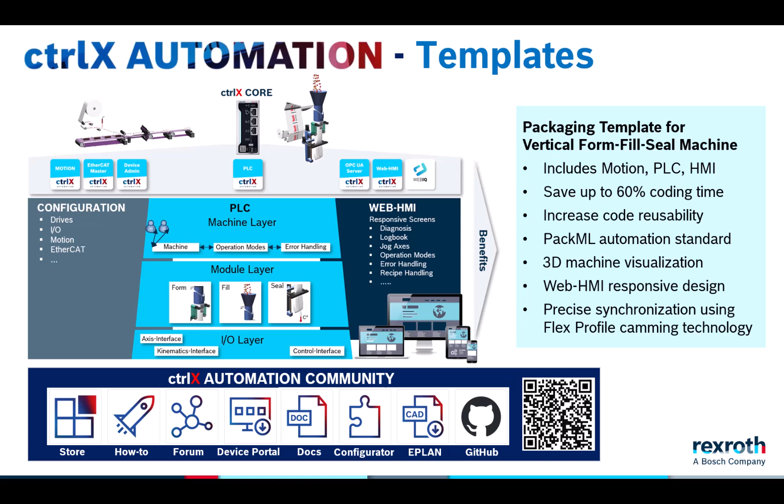Hello ctrlX fans. This video provides an overview of the Vertical Form Fill Seal template for ctrlX Core.

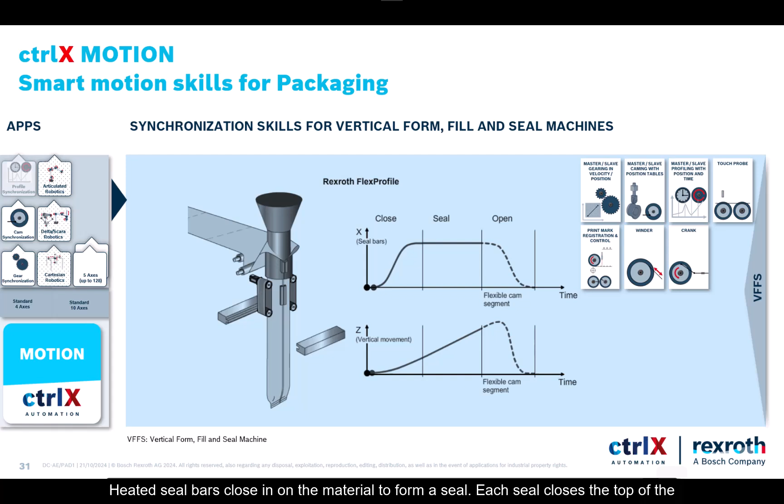Vertical Form Fill Seal is a packaging application in which food or other product is deposited from a hopper into a continuous flow of packaging material such as foil or plastic. Heated seal bars close in on the material to form a seal. Each seal closes the top of the last bag and forms the bottom of the next bag.

The seal bars are controlled by a horizontal axis, sometimes referred to as the jaws, which open and close. Since it's a continuous process, a vertical axis is required to synchronize the jaws to the material while the seal is being formed, and then return to the top for the next seal.

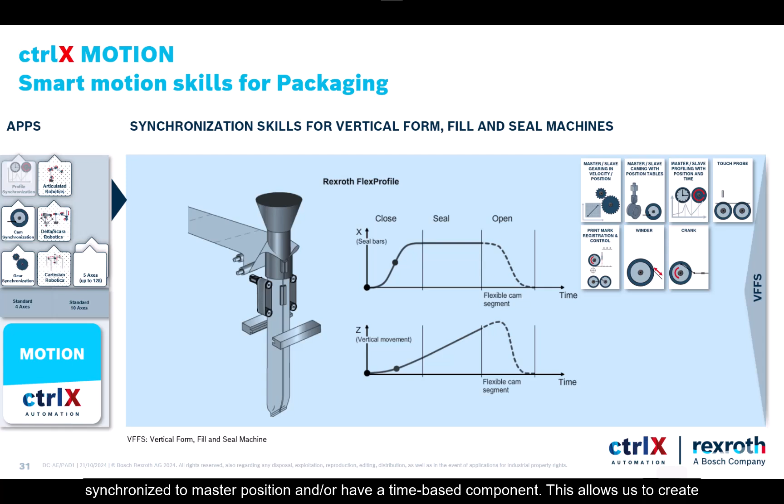This motion is achieved using Flex Profile. Flex Profile is a form of electronic camming with special features that lend itself to this application. For example, a Flex Profile segment can be synchronized to master position and/or have a time-based component. This allows us to create a profile which stays synchronized to the web while the seal is being made, and hold sealing time constant as the profile adapts on the fly to changes in machine speed.

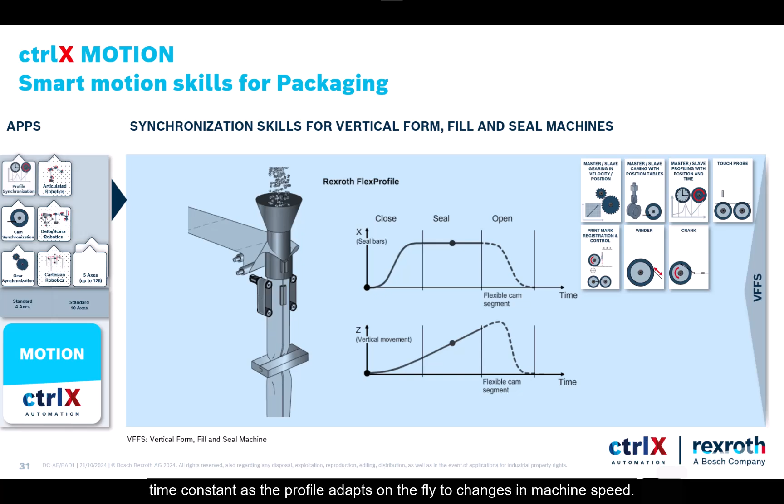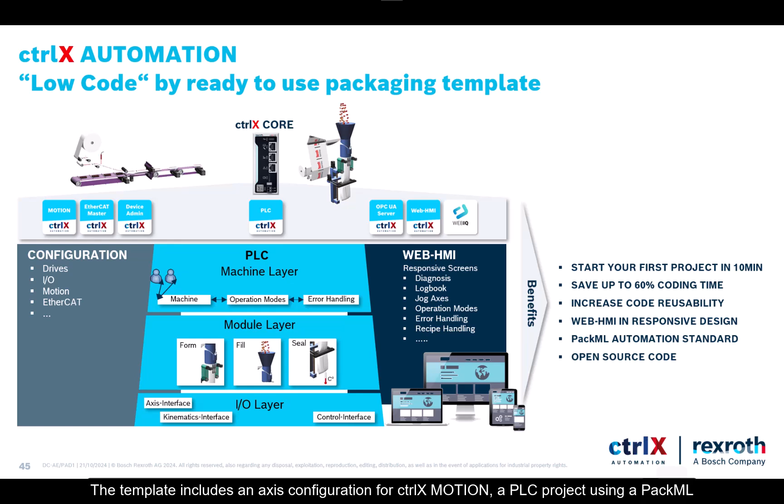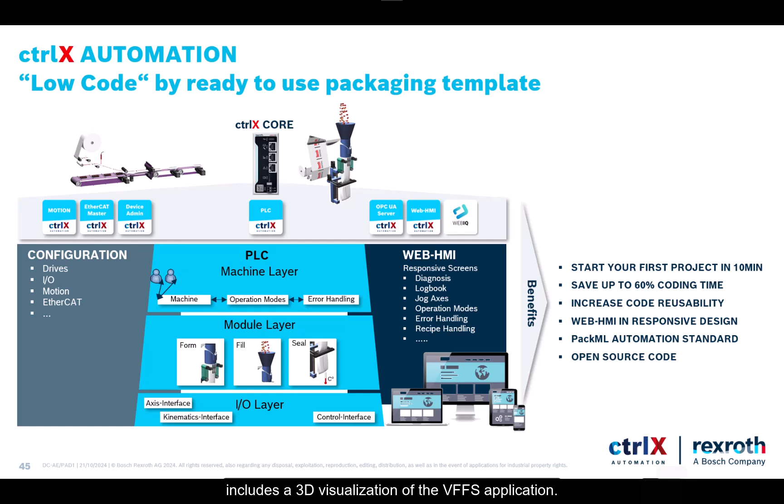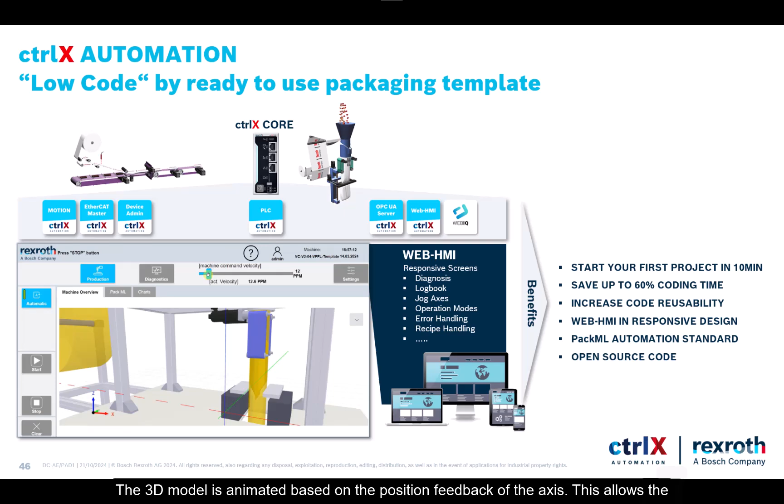The template includes an axis configuration for ctrlX motion, a PLC project using a PackML programming structure, and a web-based HMI using WebIQ. It also includes a 3D visualization of the Vertical Form Fill Seal application. The 3D model is animated based on the position feedback of the axes. This allows the user to visualize the process without needing any physical drives or machinery present.

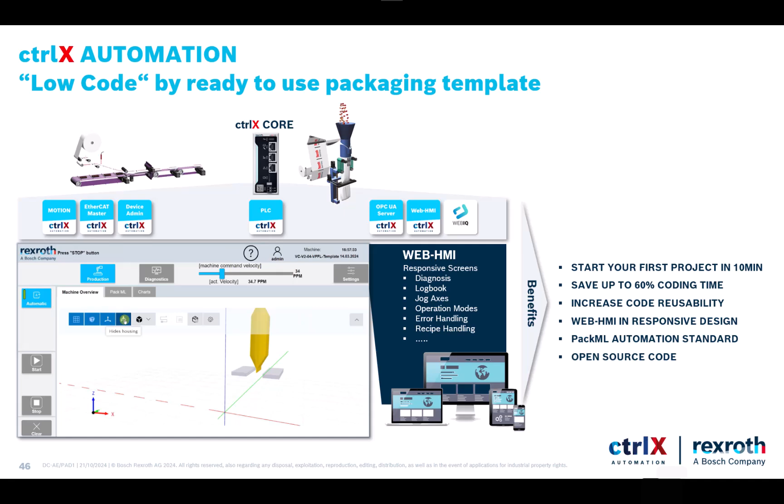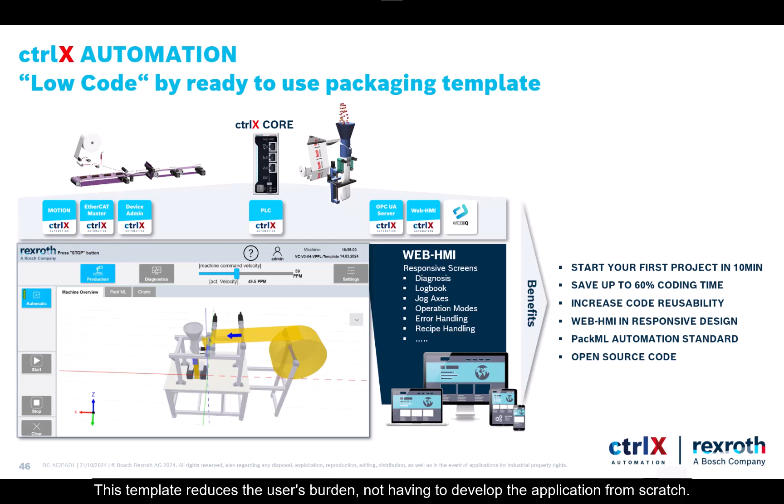Using this template reduces the burden on the user to have to develop the application from scratch. Included in the template package is this image of a virtual ctrlX core that has everything that's needed for the template preloaded on it. And this how-to guide tells you how to set up and run the virtual ctrlX core, and then run the application.

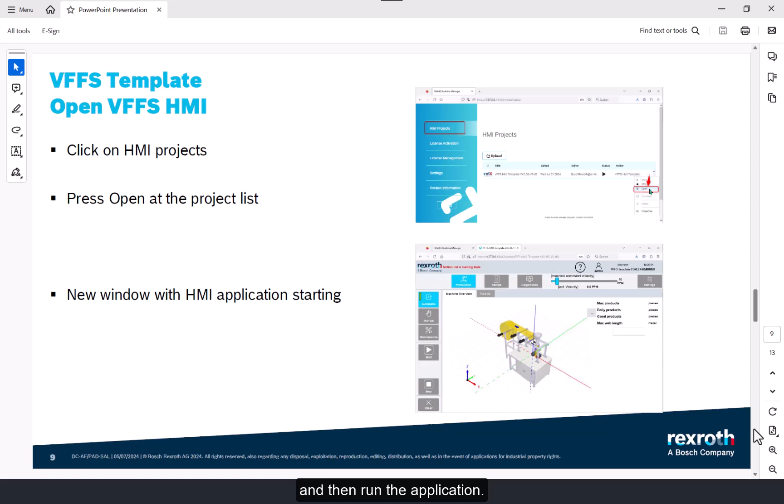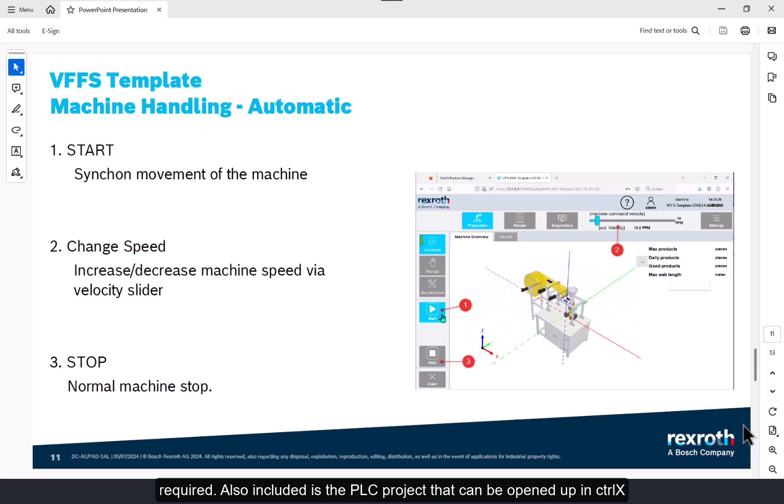This allows you to test the motion, PLC, and HMI without needing any hardware and without needing any software licenses. A free download of ctrlX Works is all that is required. Also included is the PLC project that can be opened up in ctrlX PLC Engineering, and the WebIQ HMI project.

And the app data archive, which could be loaded to a ctrlX core. The app data includes the EtherCAT and motion configurations along with the compiled PLC project. This is the dashboard of a ctrlX core that is running the Vertical Form Fill Seal template. Let's take a look at the apps and licenses that are involved.

If you only want to run this on the virtual ctrlX core to evaluate it, then you don't need any licenses. All the apps on a virtual ctrlX core will work for 4 hours of runtime, and after that point you can stop and restart the virtual machine to get 4 more hours. But I'll point out the licenses that are needed if you want to run this on a physical ctrlX core.

So we have the motion app, and with that one you'll need the motion standard 4-axis plus an additional add-on axis because 5 axes are used for this application, or a motion standard 10-axis would work. You'll also need 3 add-on licenses for motion: 1 for electronic gearing, 1 for camming, and 1 for Flex Profile.

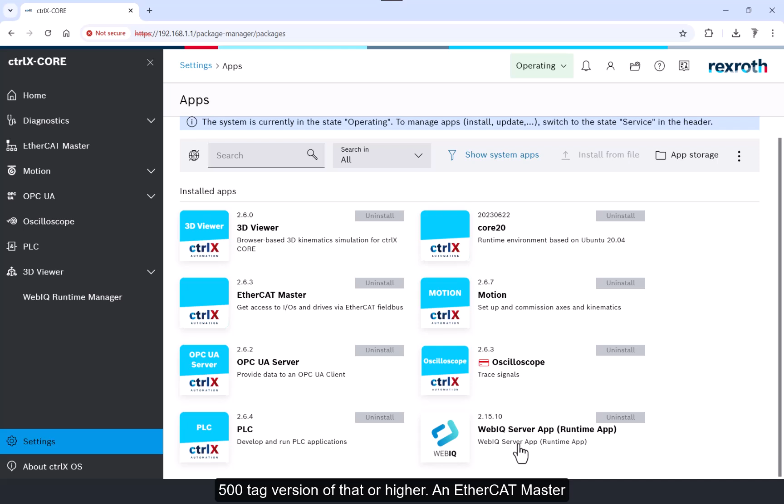And then for the PLC, you need the PLC Basic and Standard licenses, and that's for PLC version 02. And then the WebIQ server app, that's for running the web-based HMI project, and you need the 500 tag version of that or higher. EtherCAT master will be needed when you get to the point of connecting the axes in motion to physical drives to actually run a machine, and so this requires an EtherCAT master license.

The 3D viewer app is used to visualize the CAD model of the machine and animate it in real time while the machine is running, so that requires a license. OPC UA server is needed to connect the WebIQ application to the ctrlX core, so that needs a license. The oscilloscope app is just an optional app for diagnostics and troubleshooting to be able to trace signals in the motion and PLC, but that is not needed to run this template.

And the Core 20 is just a system app that's needed for WebIQ to run. This app does not require any license. From the ctrlX core dashboard, we can go to the 3D viewer app.

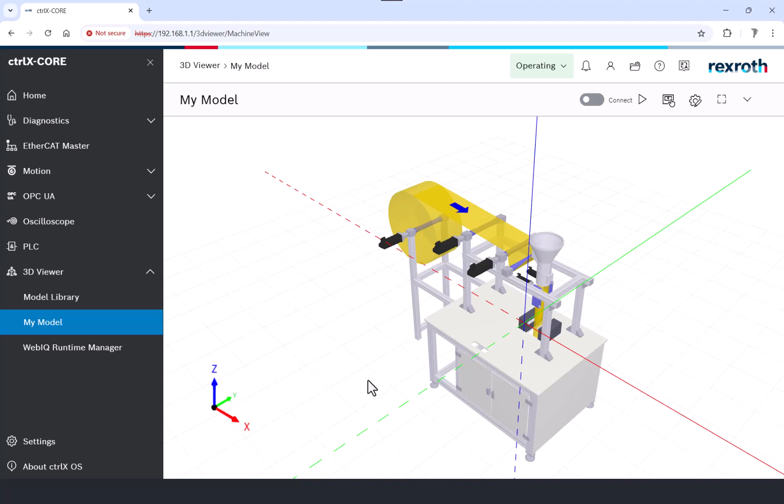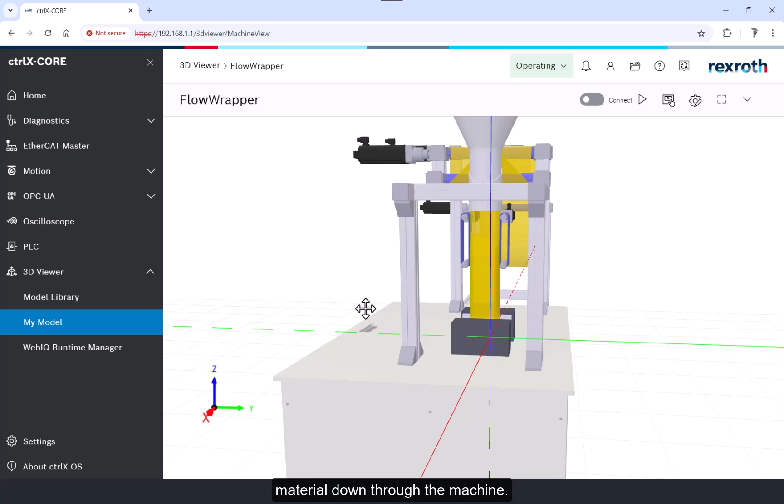And so this is the CAD model of a vertical form fill seal machine. And we've got these two belt axes that are pulling the packaging material down through the machine. So these are the seal bars, and the horizontal axis, which is referred to as the jaws, are going to close in to make a seal and open up when the seal is finished. And then there's a vertical axis to synchronize the seal bars to the material while the seal is being made.

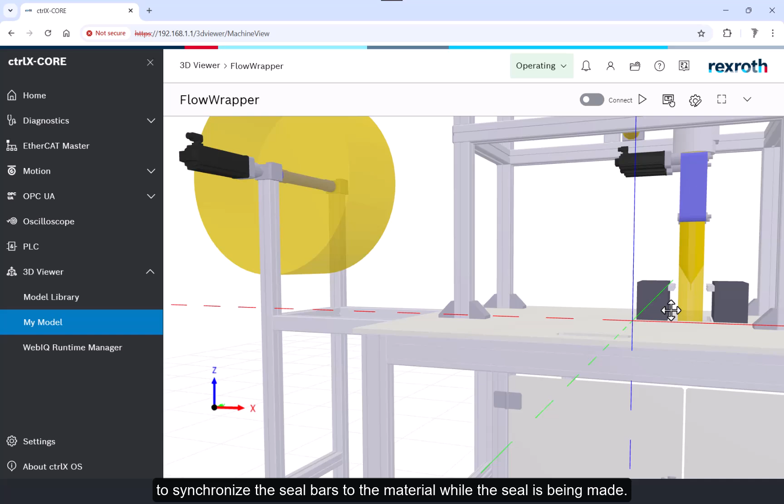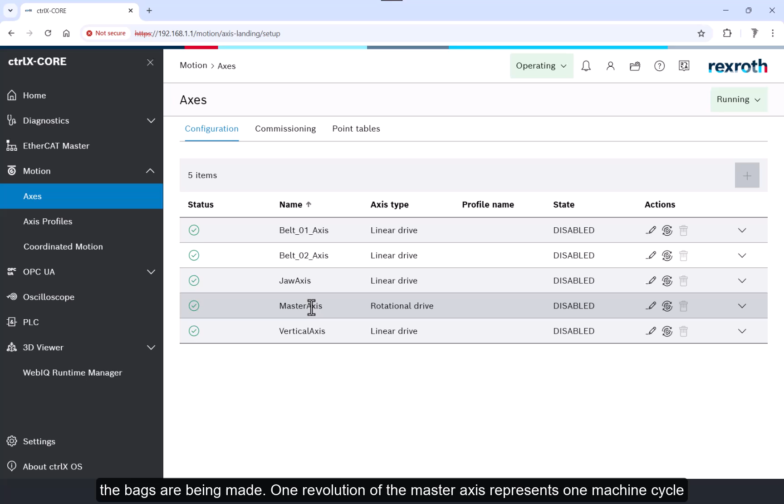So let's look at the axes that are configured in the Motion app. The master axis is a virtual master that's used to synchronize the motion of the other axes as the bags are being made. One revolution of the master axis represents one machine cycle, or one bag.

The belt axes draw the packaging material through the machine, and these run in position synchronization to the master axis. There's the jaw axis that controls the horizontal open and closing motion of the seal bars, and then the vertical axis for the vertical motion of the seal bars.

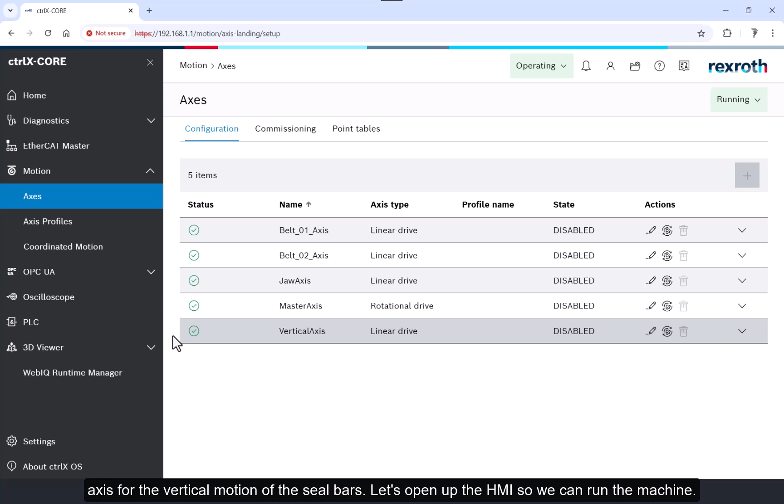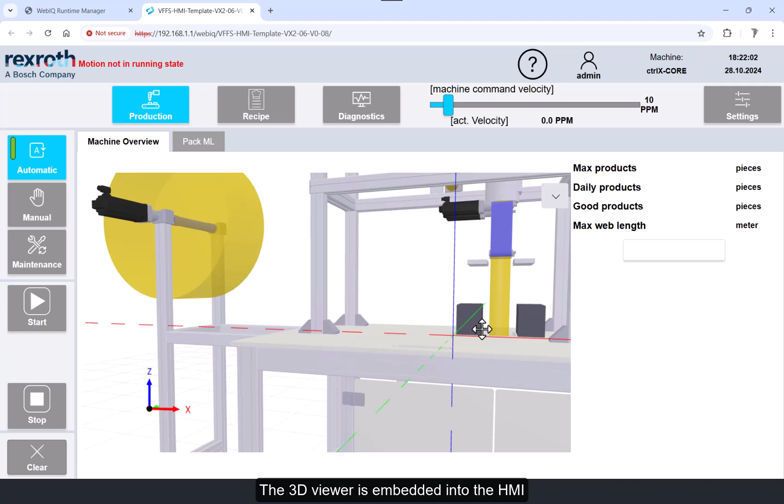Let's open up the HMI so we can run the machine. The username and password is Bosch Rexroth1. And then we'll go to HMI projects and then open. The 3D viewer is embedded into the HMI along with a visualization of the PackML state machine.

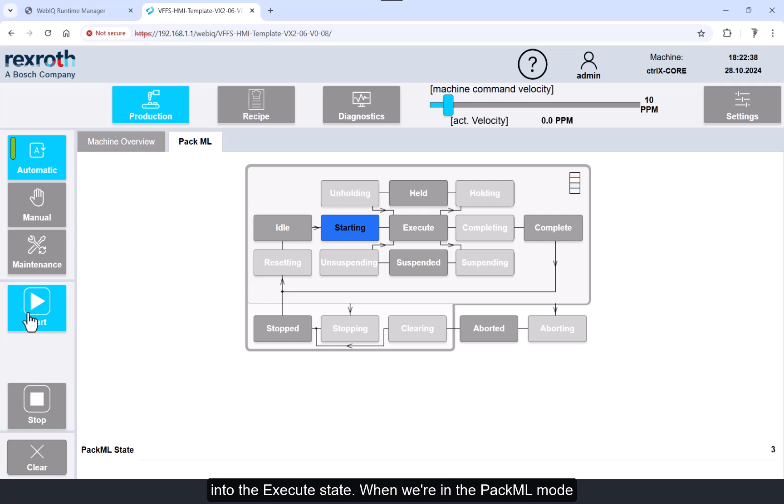After the ctrlX CORE boots up, we have to click clear twice to get it into the idle state. And then start to get into the execute state. When we're in the PackML mode automatic and the state is execute, that means the machine is producing products.

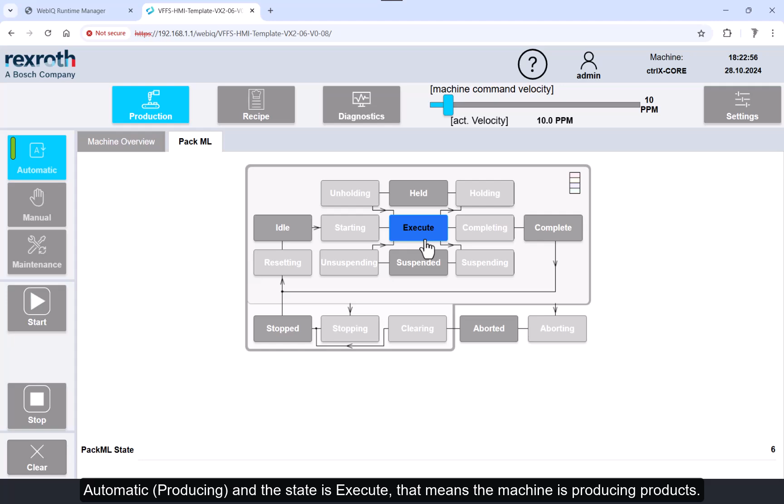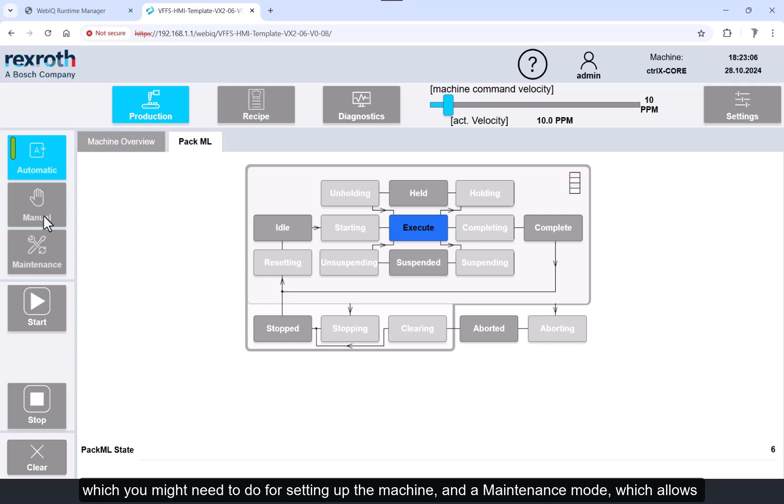There's also a manual mode which allows you to slowly jog the machine in a synchronized fashion, which you might need to do as you're setting up the machine, and a maintenance mode which allows independent jogging of the axes during machine commissioning and maintenance.

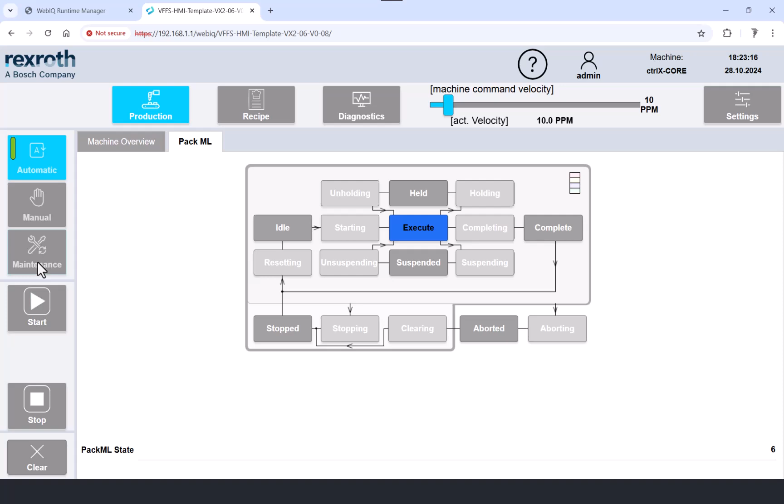Let's go back to the machine overview. So here we can see a visual representation of the bags being sealed after the product has been deposited. Notice how the seal bars match the speed of the product as they close and make the seal.

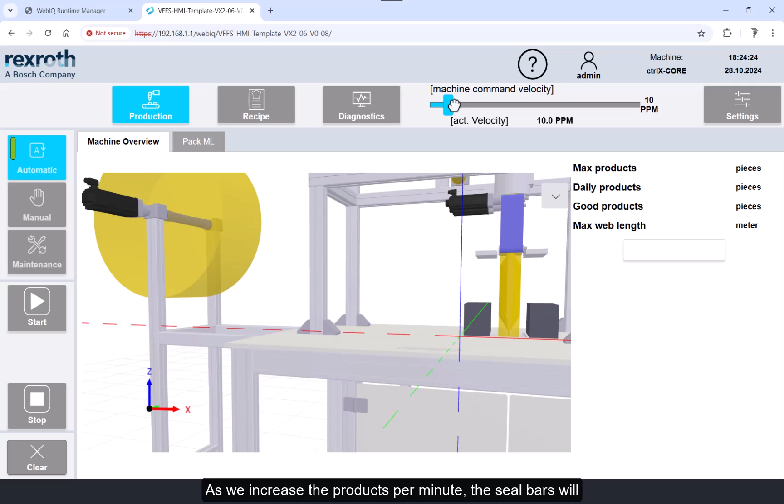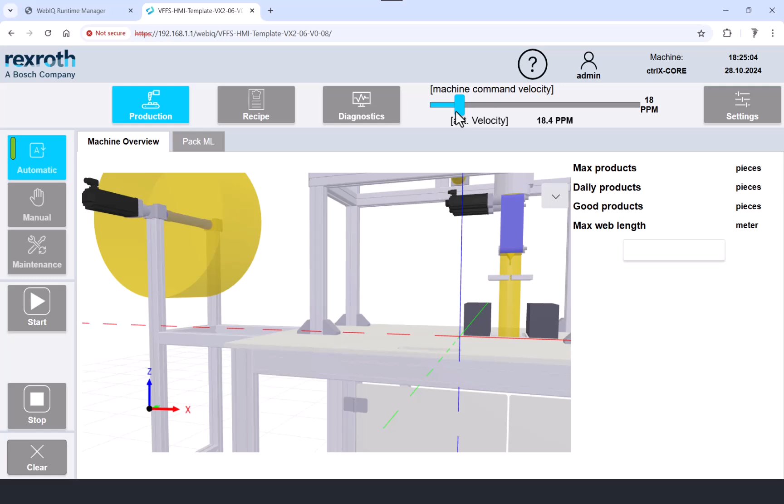As we increase the products per minute, the seal bars will stay closed for a longer vertical distance as the seal time is kept constant. And we can view the operation from various angles and zoom in and out.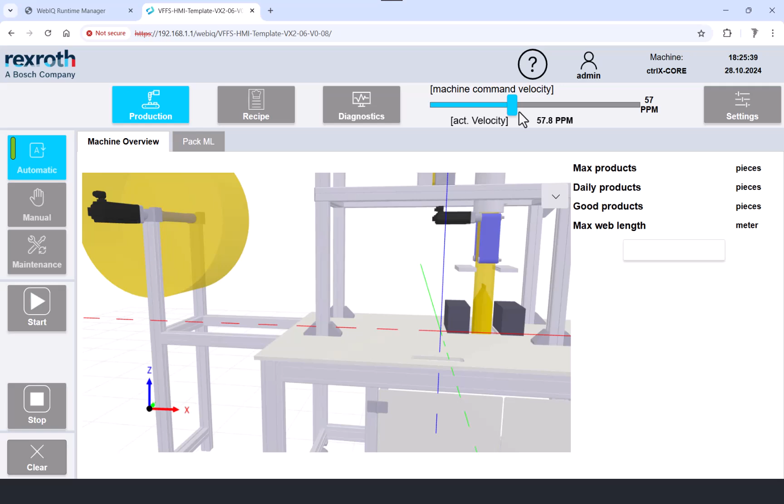If we look at the axis status while it's running, we'll see that the belt axes are in synchronized motion, as is the vertical axis that's running the flex profile. The jaw axis will toggle between standstill and discrete motion.

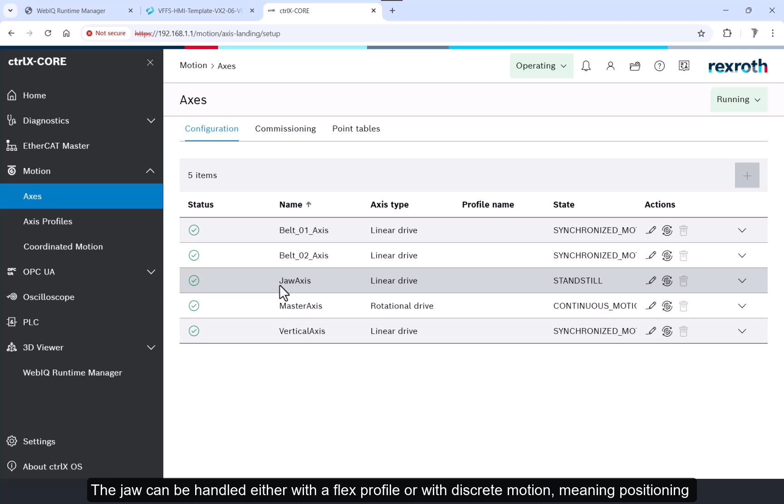The jaw can be handled either with a flex profile or with discrete motion, meaning positioning moves to the open and closed positions. And in this version of the template, it is handled with discrete motion. And then the master axis is running in continuous motion.

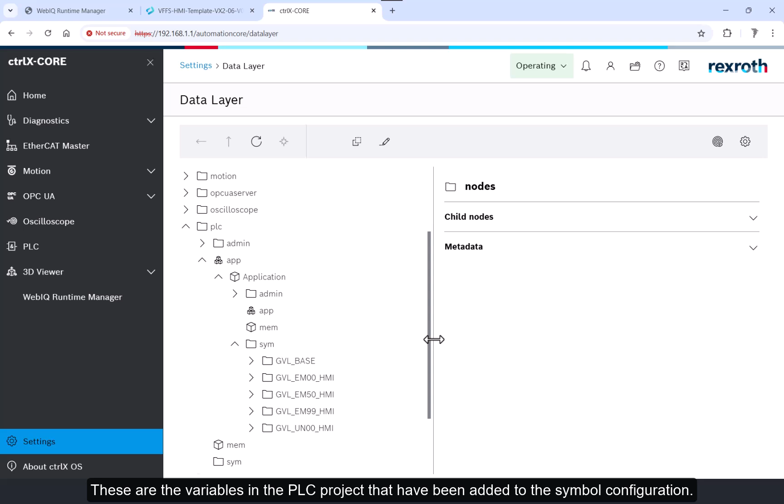Let's take a look at the data layer. These are the variables in the PLC project that have been added to the symbol configuration so that they're available on the data layer for the HMI or for other applications to access. Some of these have been linked to the WebIQ HMI application, some of them have not yet.

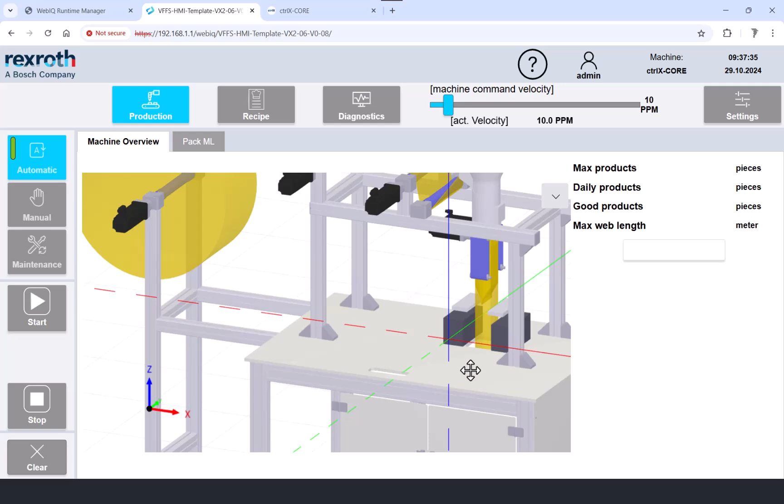Let's take a look, for example, at jaw close time. So this would control the seal time. Right now it's set to 500 milliseconds. So if we take note of the distance traveled while it's closed,

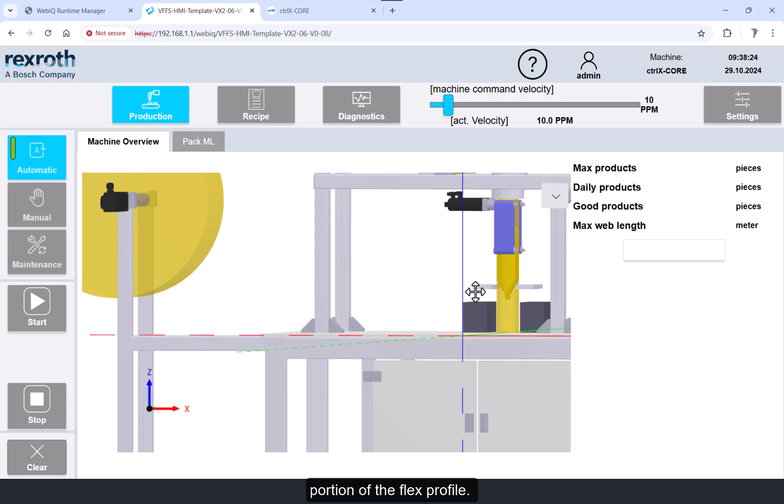and then we change this, let's say to 1,000 milliseconds, you can see the effect that the jaw is now open at a lower position because it remains closed for longer during the downward portion of the flex profile.

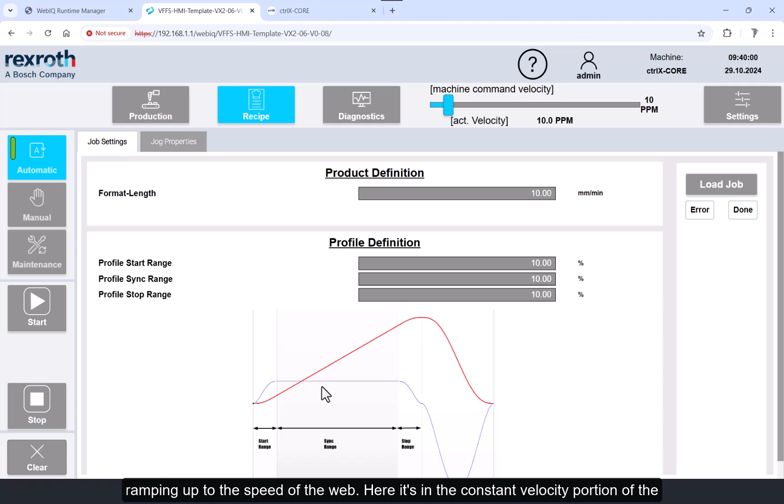This is an example of what the flex profile for the vertical axis looks like. Here you see it ramping up to the speed of the web. Here it's in the constant velocity portion of the profile where the sealing would occur. Then decelerate and then return back to the beginning for the next product cycle.

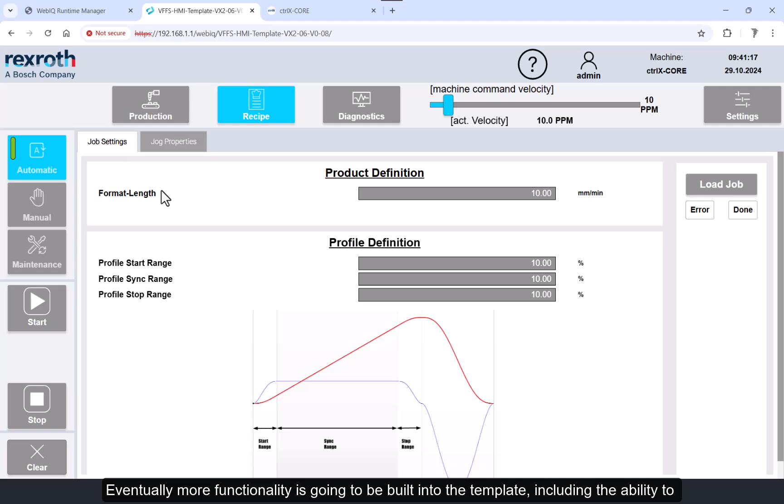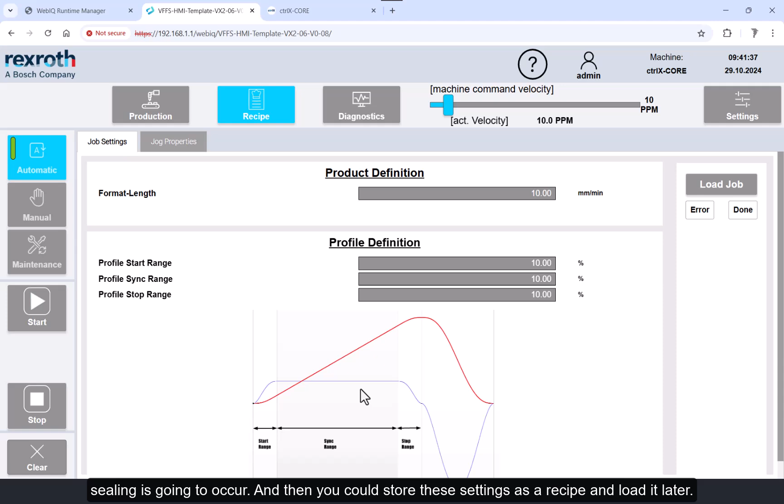Eventually, more functionality is going to be built into the template, including the ability to change the format length or bag length and change the flex profile structure. For example, you could change the starting point and the length of this constant velocity portion where the sealing is going to occur. And then you could store these settings as a recipe and load it later. These features are roughed out here but not implemented in this version of the template.

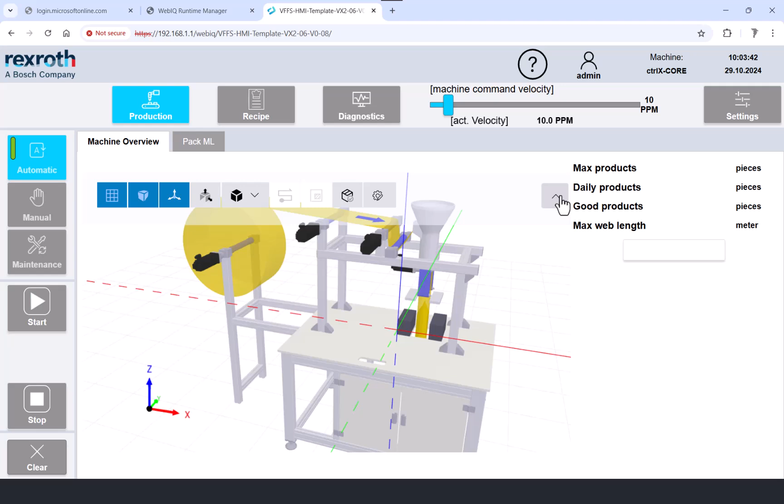Let's go back to production. A couple more points about this 3D viewer. If you don't like these dimensional lines, you can turn that off by clicking here. And if you click here, you remove everything but the seal bars and the product.

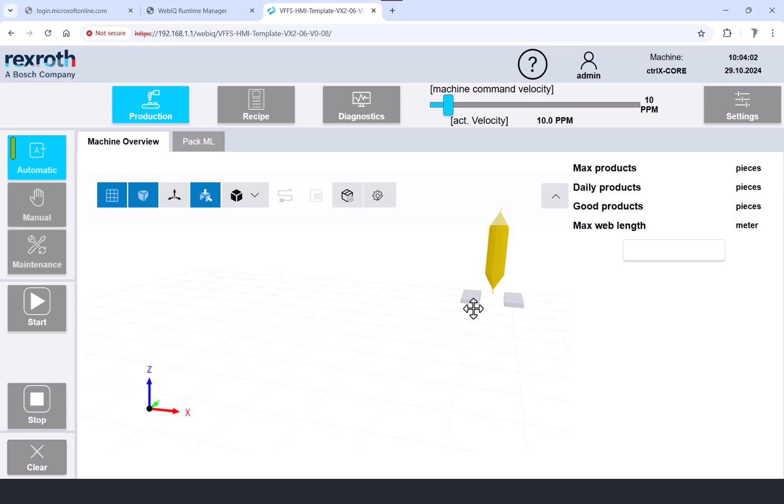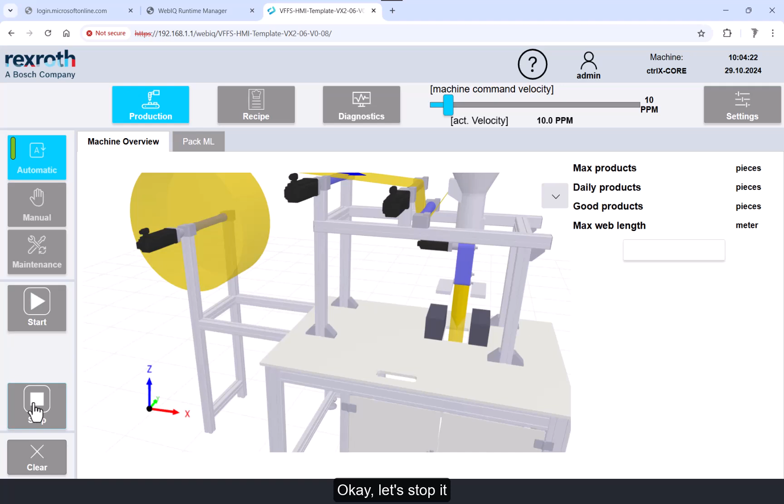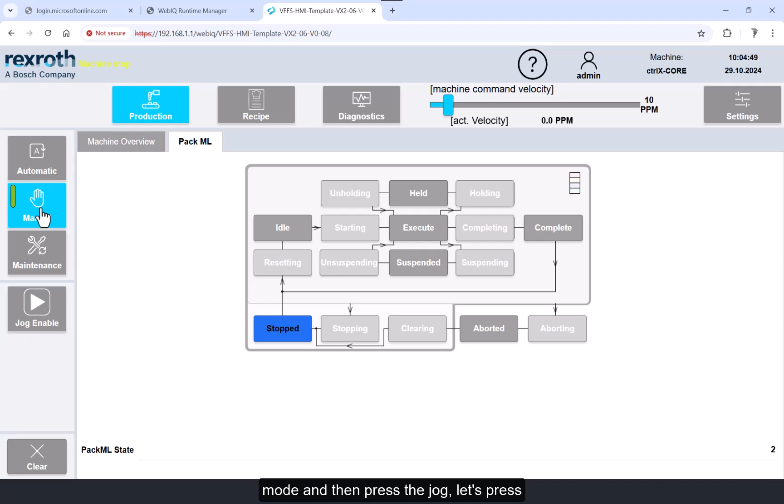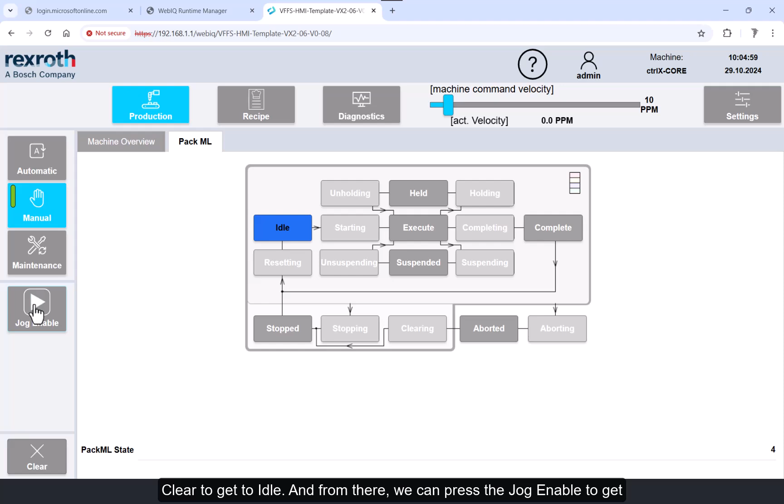Okay, let's stop it. And we'll look at the PackML diagram. When it's stopped, we can switch between these three different modes. So if we go to manual mode, let's press clear to get to idle. And from there we can press the jog enable to get to execute. And then we'll go to the machine overview screen. And now we have these buttons to jog the virtual master.

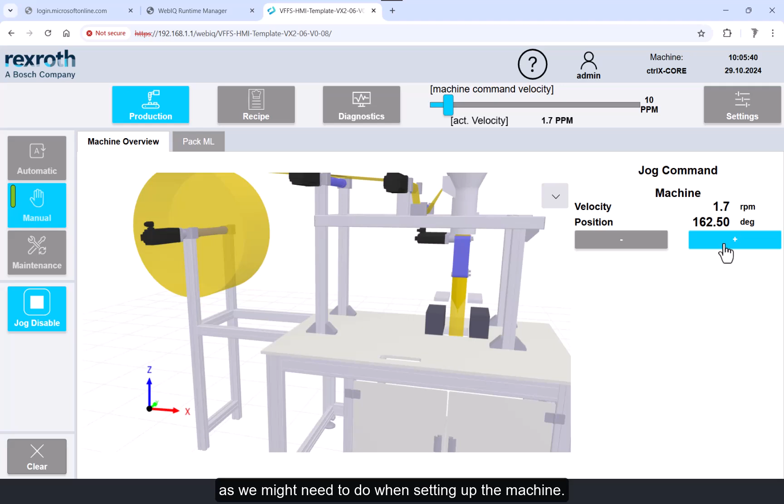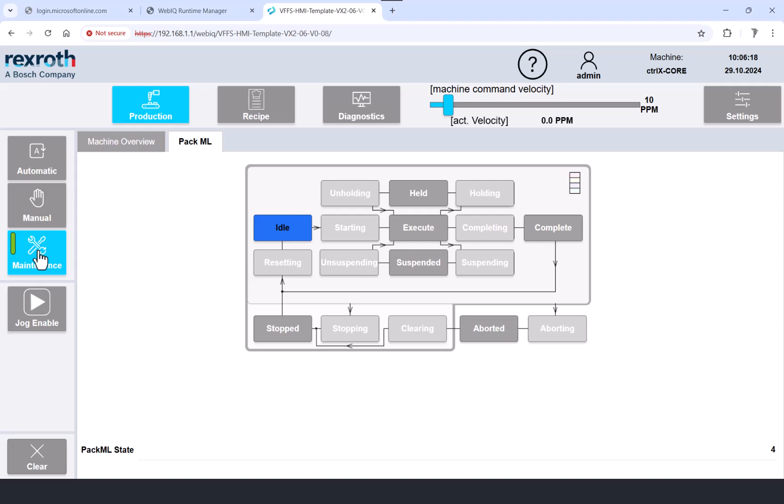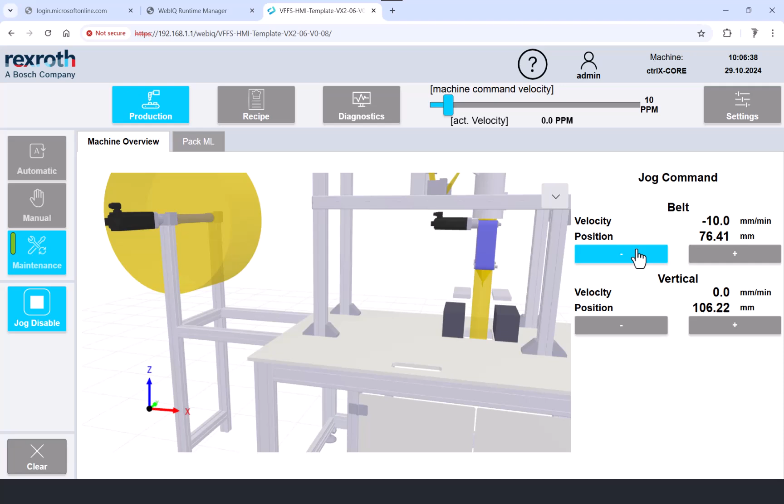So this allows us to inch the machine along or step it through slowly, as we might need to do when setting up the machine. And then if we look at maintenance mode, now we have buttons to individually jog the axes. For example, here we're just jogging the belts. If you want to change the jog speed, you can go back to the recipe screen and then jog properties.

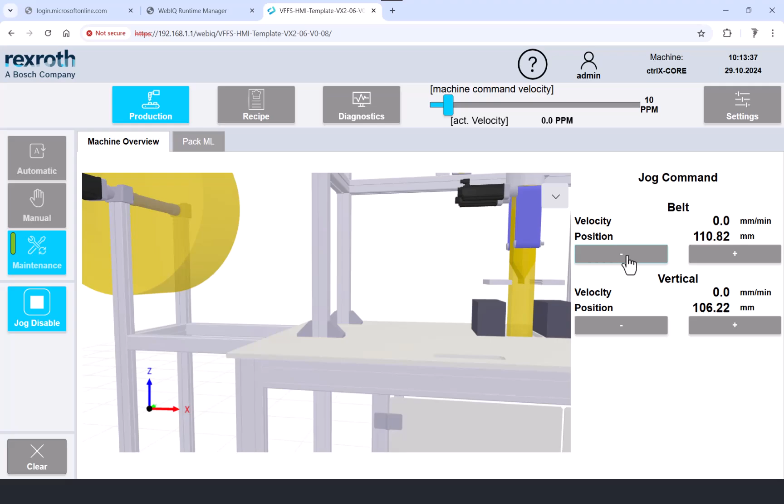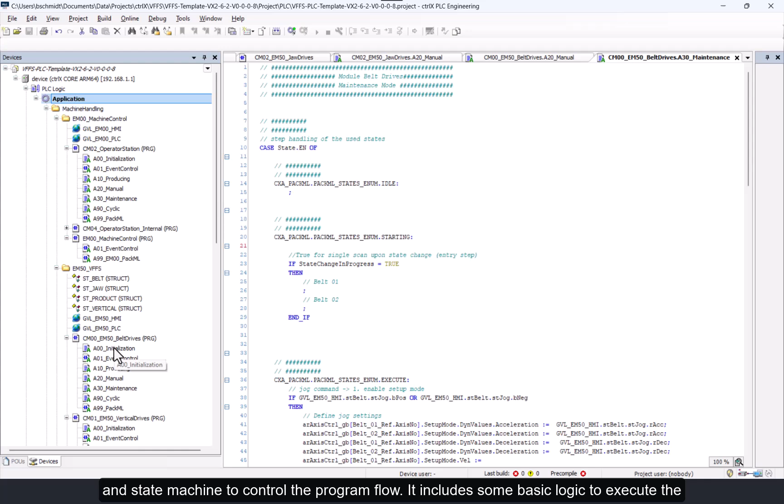So this kind of functionality could be used for initial commissioning, for maintenance operations, or for clearing a jam, for example. Let's take a look at the PLC project. This uses a PackML programming structure and state machine to control the program flow. It includes some basic logic to execute the motion functions, but can easily be adapted by going to the relevant containers and editing the code.

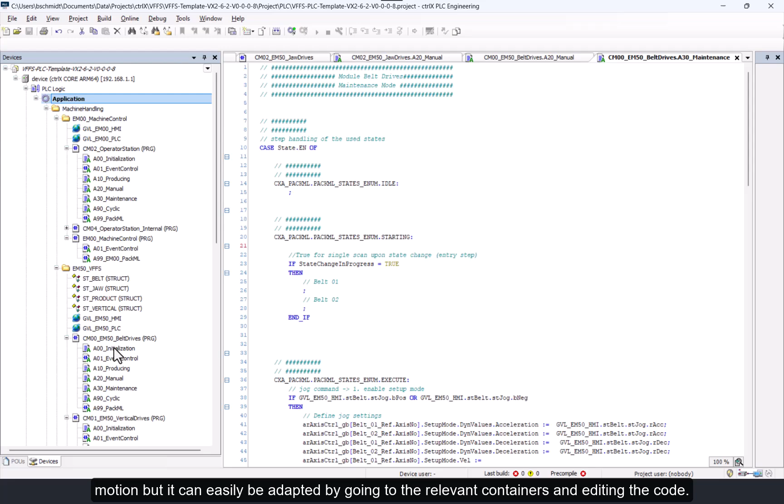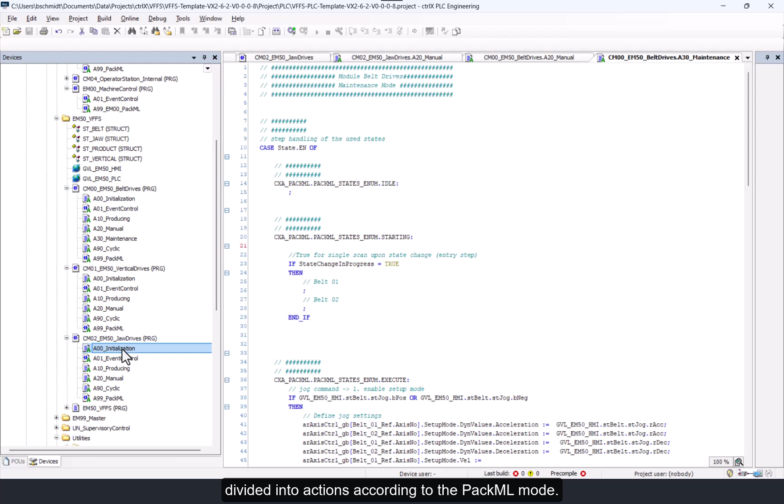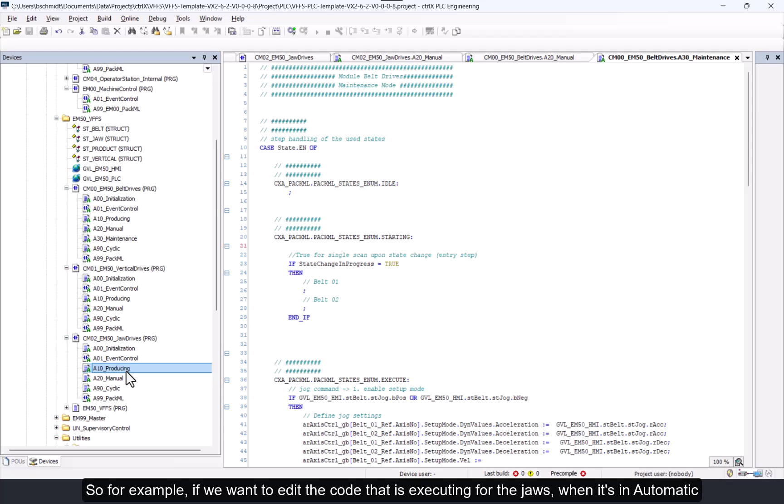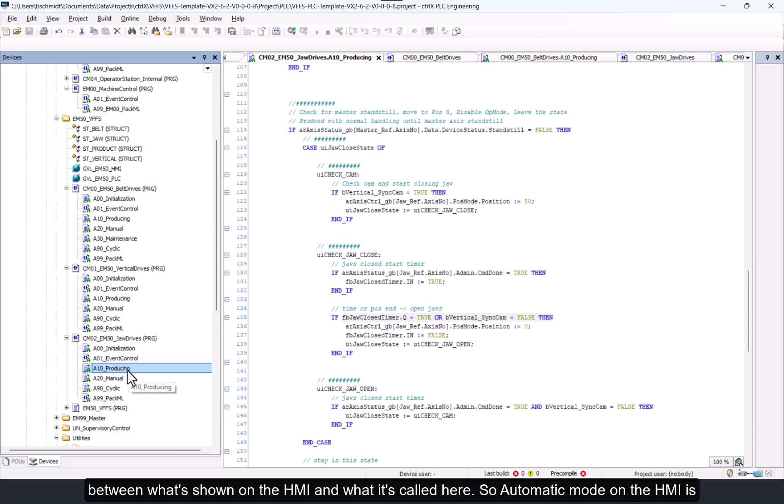For example, each axis has its own POU with logic divided into actions according to the PackML mode. So for example, if we want to edit the code that is executing for the jaws when it's in automatic mode, we go to producing. There's a slight difference in the nomenclature between what's shown on the HMI and what it's called here. So automatic mode on the HMI is equivalent to producing here in the PLC project.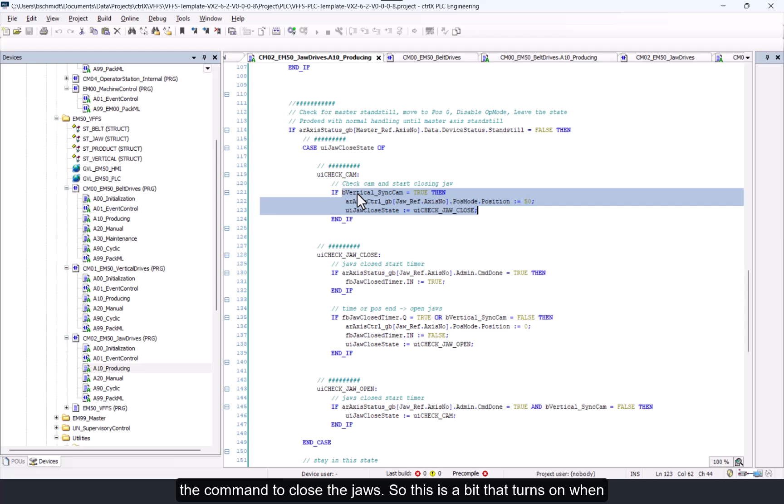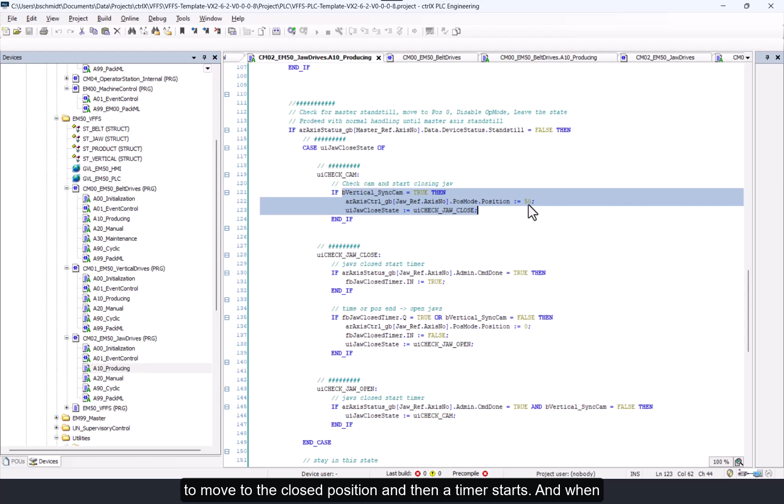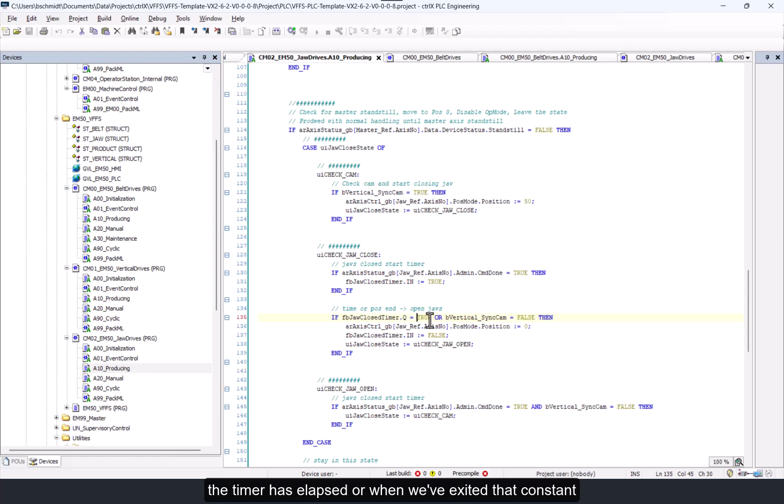And so here's the command to close the jaws. So this is a bit that turns on when the vertical axis has entered into the constant velocity speed match portion of its profile. And so when that turns on, the jaws are commanded to move to the closed position. And then a timer starts. And when the timer has elapsed, or when we've exited that constant velocity portion of the profile, the jaws are commanded to open again.

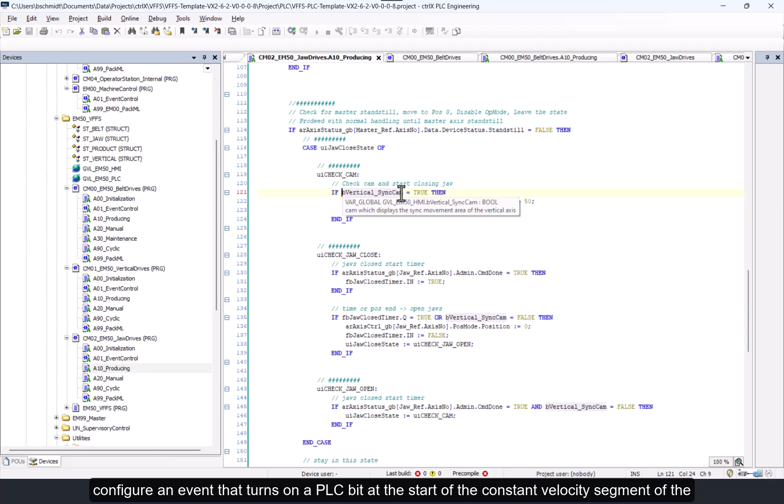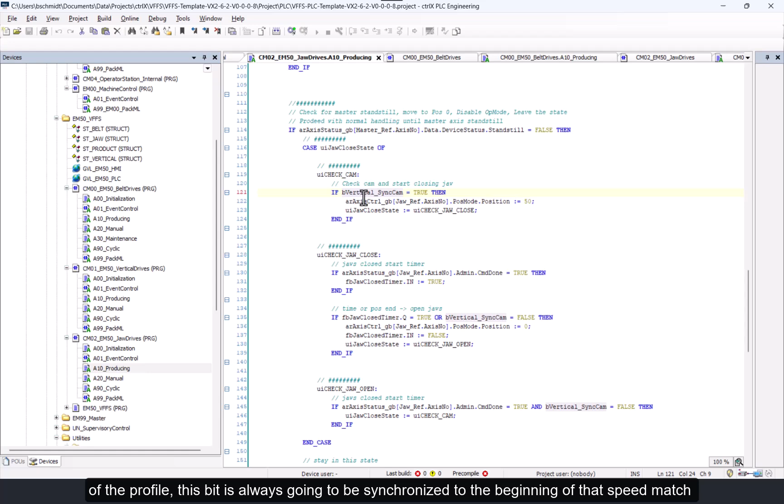One of the other features of Flex Profile is the ability to configure events. And so you can configure an event that turns on a PLC bit at the start of the constant velocity segment of the profile. And that way, even if you change the beginning and ending positions of that portion of the profile, this bit is always going to be synchronized to the beginning of that speed match portion where you want the seal to occur.

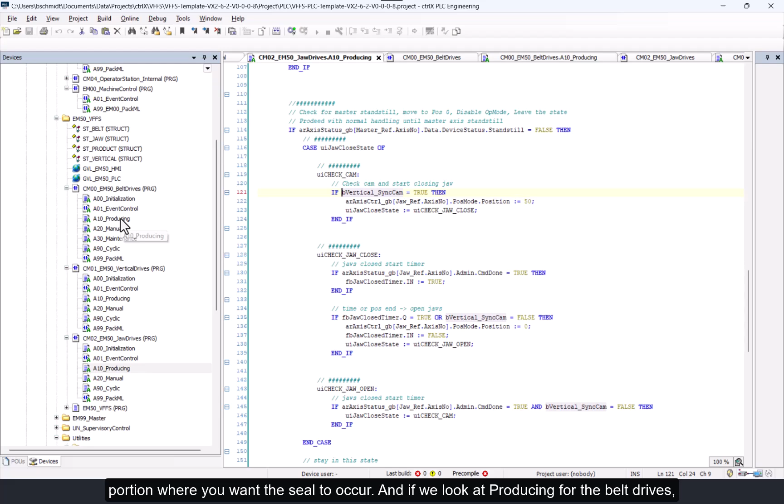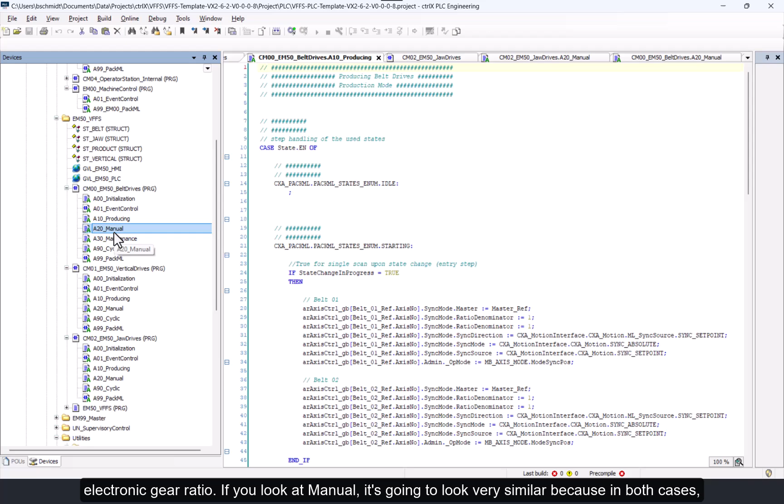And if we look at producing for the belt drives, here it's getting the command to synchronize to the master with a 1-to-1 electronic gear ratio. If we look at manual, it's going to look very similar because in both cases the belt drives are synchronized to the master, whether we're in producing mode, which is normal machine run, or manual mode, which is jogging the machine in a synchronized fashion.

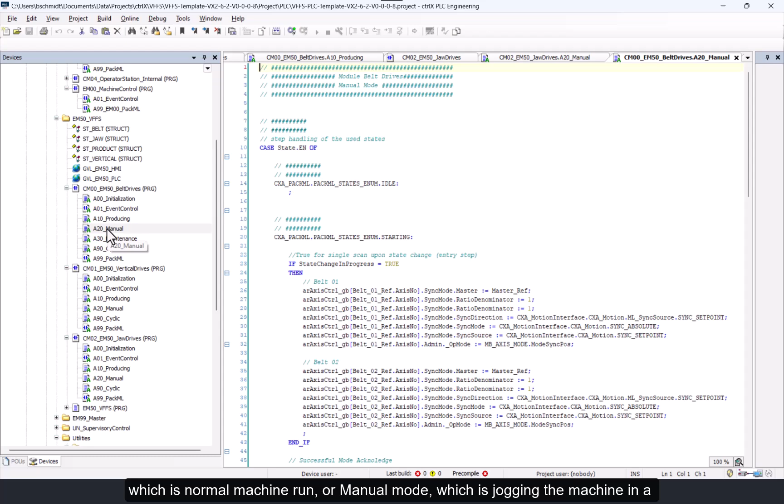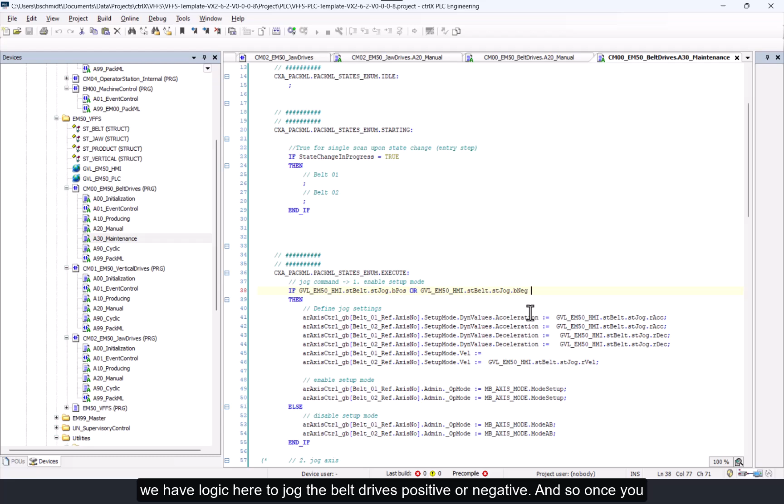If we go into maintenance mode, we have logic here to jog the belt drives, positive or negative. And so once you orient yourself with the layout of this project and the connection points to the PackML modes and states, you'll be able to add or edit the functionality to suit your needs.